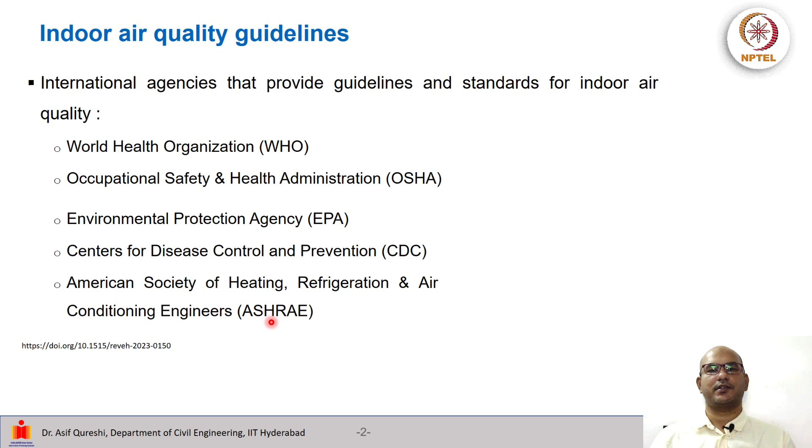The World Health Organization works on developing and maintaining the health of the entire world - that is its mandate in a way. For air quality, it works on developing health-based guidelines for maintaining air quality with a view to controlling the impacts on human health. The WHO was founded in 1948 and is an organization of 194 member states. It is headquartered in Geneva, Switzerland, and has 6 regional offices and 150 field offices across the whole world.

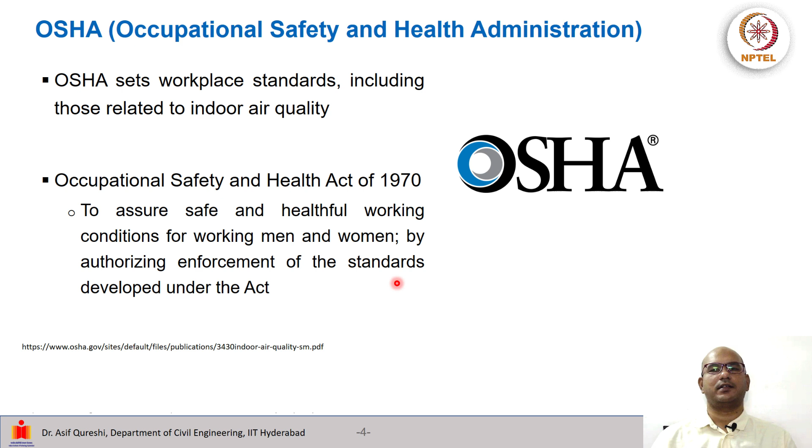The OSHA, Occupational Safety and Health Administration - as the name suggests, deals with occupational safety and health. OSHA sets workplace standards, including those related to indoor air quality. It makes standards for overall health and safety in occupational settings, meaning in factories or other industries where people go to work as part of their occupation. So within the purview of all standards and quality, we also have indoor air quality, which is set by OSHA. It is governed by, or the driving force is, the Occupational Safety and Health Act of 1970 in the US, to assure safe and healthy working conditions for all workers, by authorizing the enforcement of standards developed under the Act.

Then there is the EPA, US EPA. First we are looking at global and other countries, and we will also cover the Indian scenario. EPA's indoor air quality guidelines cover various aspects of indoor air quality. These include maintaining, mitigating, or keeping a check on health risk, then exposure reduction - reducing exposure to different kinds of pollutants in the indoor air environment, which in turn will reduce the health risk. And then how can air quality be improved in the indoor environment? It also provides an indoor air quality reference manual and a building air quality guide, even giving guidance to people constructing or designing a new building on how to go about construction and the whole arrangement to have appropriate indoor air quality.

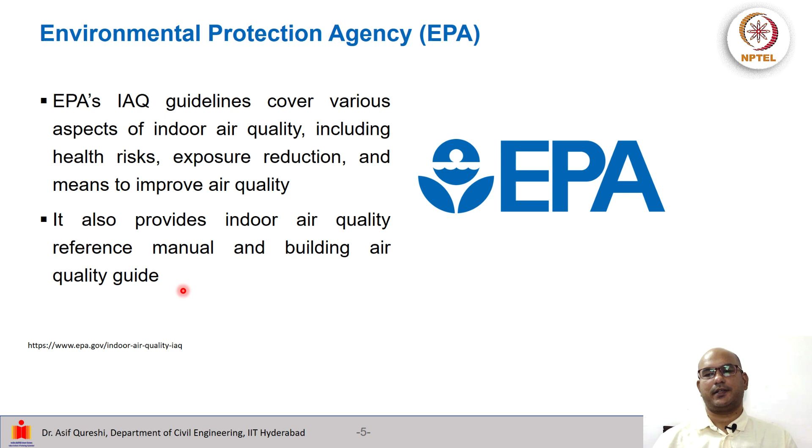Then we have the International Organization for Standardization, ISO. ISO also provides a framework for assessing and improving indoor air quality in buildings - we have actually looked at this before in one of the earlier weeks. ISO provides these guidelines and also addresses many factors that affect the health and well-being of building occupants. So it contains a whole suite of factors and scenarios to improve overall health conditions.

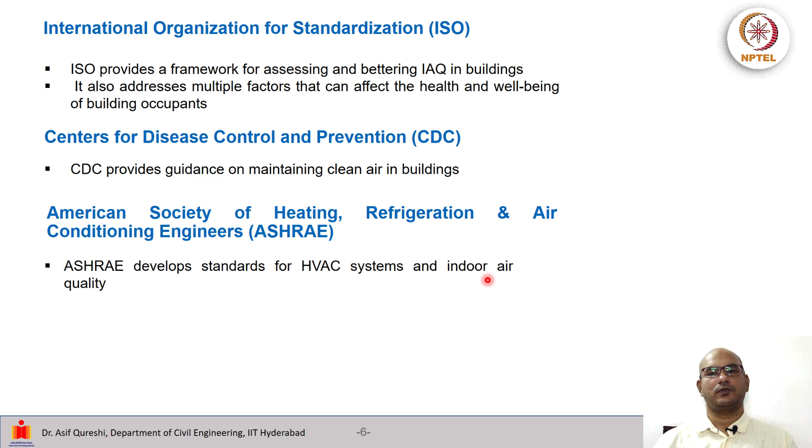There are other agencies such as the Centers for Disease Control and Prevention, which provides guidelines for maintaining clean air in buildings with the view of preventing the spread of disease, as well as controlling or preventing disease from happening. Finally, there is the American Society of Heating, Refrigeration and Air Conditioning Engineers, and the idea here is that it develops standards for HVAC systems, ventilation systems, and indoor air quality.

So what is a guideline and what is a guideline value? A guideline is a recommendation or guidance given on the protection of human beings or receptors in the environment from adverse effects of air pollutants - it can be more qualitative, that one should do something or should not do something. A guideline value, on the other hand, is a particular form of guideline with a numerical value expressed either as a concentration in ambient air or as a deposition level that is allowed. So a guideline value gives a hard number, quantitative information on what can actually be done or achieved to enforce this guideline, whereas a guideline is more qualitative. For example, 'the concentration should be controlled' is a guideline. 'The concentration should be controlled so that it is below 1 microgram per meter cube' gives us a guideline value of 1 microgram per meter cube. That is the difference.

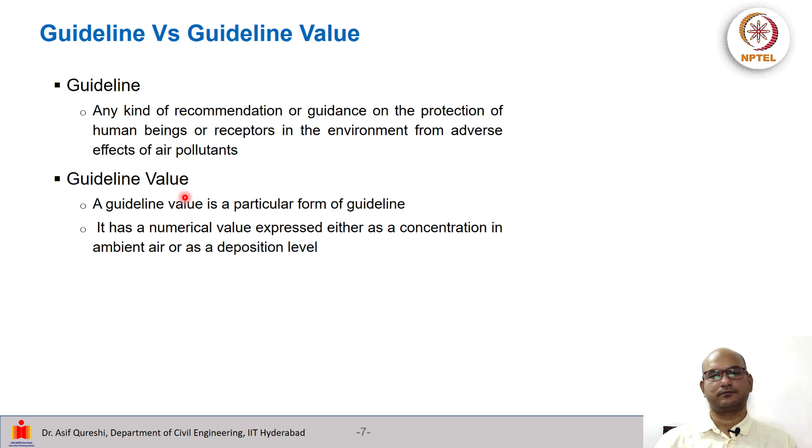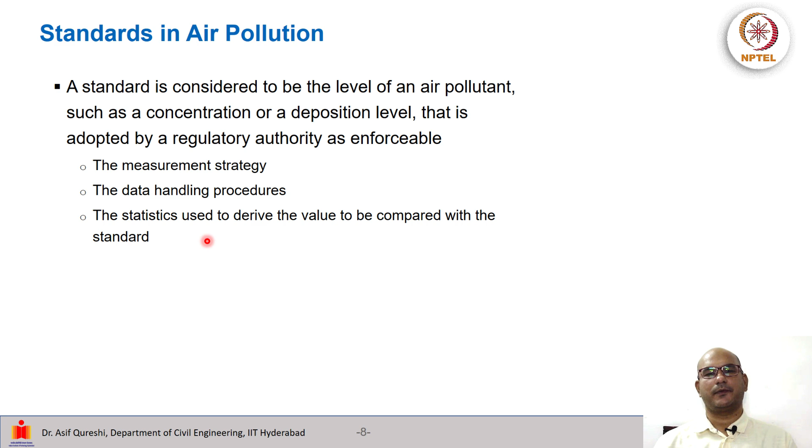Now, standards in air pollution. A standard is the level of an air pollutant, such as a concentration or deposition value, that is adopted by a regulatory authority as enforceable - meaning the agency can force an industry, a building person, a building management, or anyone to comply with this standard value. It is enforceable by law. It can also contain measurement strategy, data handling procedures, and uses statistics to derive the value to be compared with the standard.

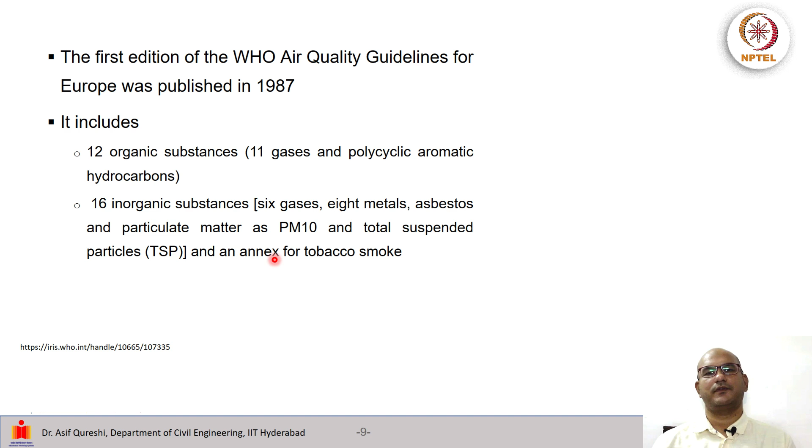The first edition of WHO air quality guidelines was published in 1987 for Europe and included 12 organic substances, of which 11 were gases and one was polycyclic aromatic hydrocarbon. There were 16 inorganic substances, including 6 gases, 8 metals, asbestos, and particulate matter as PM10 and total suspended particles. It also included an annex specially for tobacco smoke.

This guideline was then updated in 2005. Previously it only had PM10. Now it also brings fine particles PM2.5, PM10 as inhalable particles, nitrogen dioxide, and ozone.

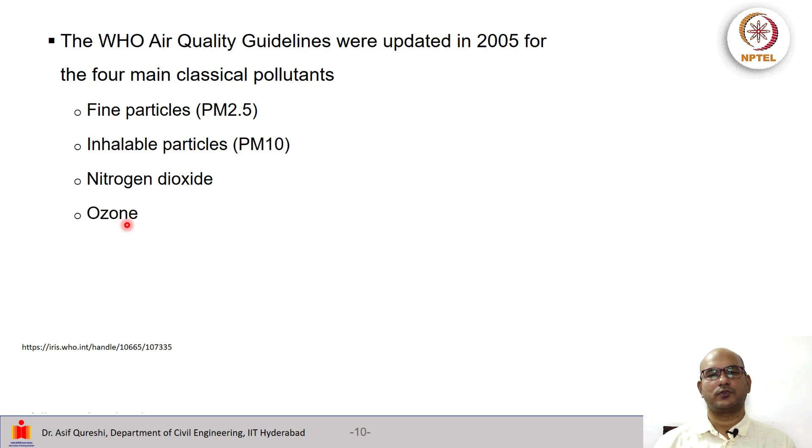So how can we have an overview now. The microclimatic requirements, we will go through like this, and these are different guidelines coming at different times: 2008, 2008, 2006, 2010, and then we are here.

Guideline values have been done in 2008 for worker security. Then 2006 and 2010, which were international values related to chemical pollution for ambient air and indoor air.

Microclimatic requirements were also introduced around 95, which was limited to certain functional units only. Then again 95 and 95. These temperature and relative humidity norms and guidelines were introduced very early with respect to which kind of room or which kind of activity we are expecting in a room, and accordingly temperature and relative humidity were given.

Ventilation requirements were also given first in terms of the external airflow rate and filter efficiency during the mid 1990s and up to around 2000. These requirements were also more limited to specific units, but by 2008 this association of engineers released guidelines covering external flow rate, filter efficiencies, and even the pressure, across several units of a house or of an indoor environment.

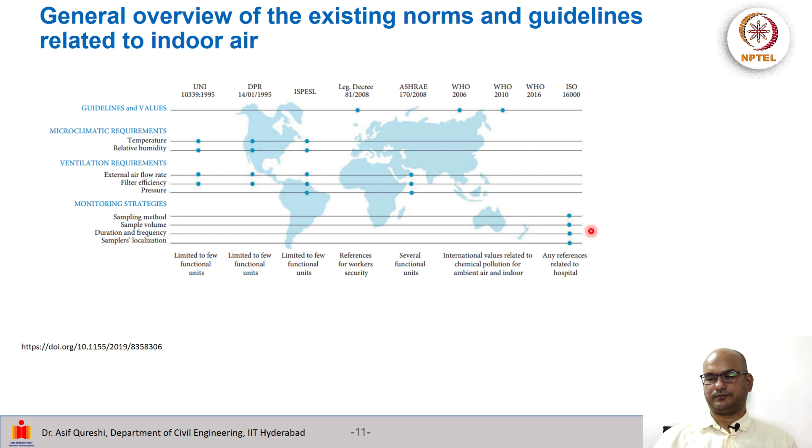There are air quality guidelines given by various agencies. The one that we have right now in front of us is the World Health Organization Air Quality Guidelines for the year 2021.

On the first column we have the pollutant, then on the second column we have the average concentration allowed over a given period. For example, annual mean means that on an annual average the PM2.5 concentration should not increase beyond 5 microgram per meter cube. But when we look at a 24-hour mean, over a 24-hour period, the PM2.5 concentration should not increase more than 15 microgram per meter cube.

There is a bit more relaxation on PM10, in that the concentration should be 15 microgram per meter cube as an annual mean, but 45 microgram per meter cube, so 3 times, for a 24-hour mean. So here 5 to 15, here 15 to 45.

For carbon monoxide there is only one 8-hour mean value given, which is 4 microgram per meter cube. For nitrogen dioxide there is an annual mean stipulated of 10 microgram per meter cube. For sulfur dioxide there is a 24-hour mean of 40 microgram per meter cube as the air quality guideline. For ozone there is an 8-hour mean of 100 microgram per meter cube, and a much lower value as an annual mean for lead of 0.5 microgram per meter cube.

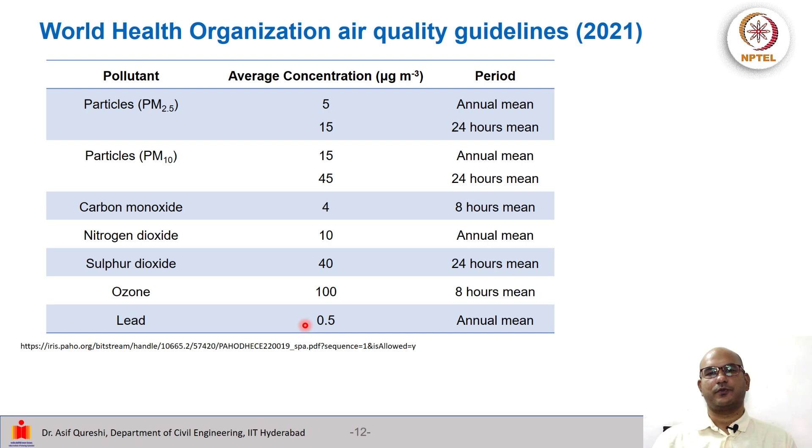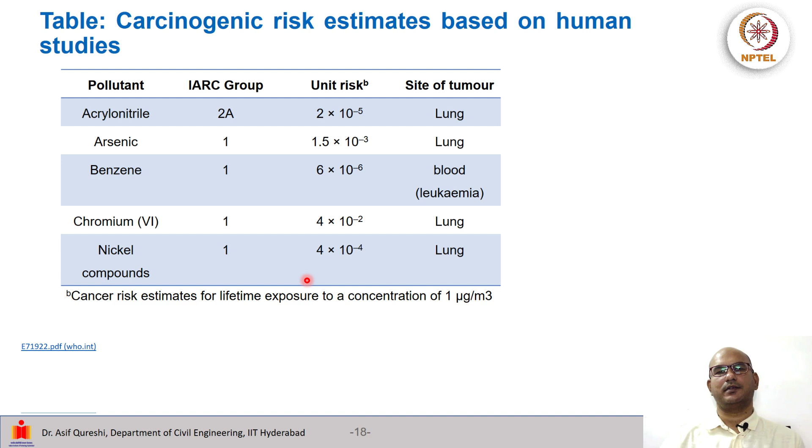Then nickel compounds, the unit risk is 4 into 10 to the power minus 4. For polycyclic aromatic hydrocarbons such as BAP, benzo-alpha-pyrene, the risk is also comparable to chromium 6, 9 into 10 to the power minus 2, the site of tumor being the lung. For refractory ceramic fibers, the risk is 1 into 10 to the power minus 6 and the site is lung. For trichloroethylene, 4.3 into 10 to the power minus 7. For vinyl chloride, 1 into 10 to the power minus 6.

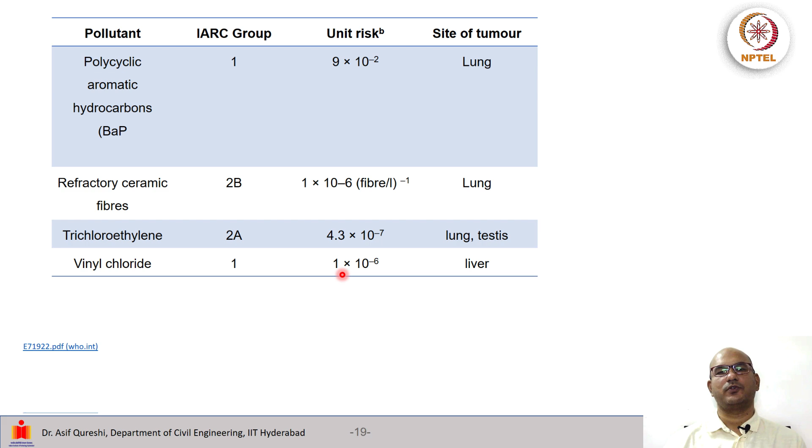Now radon, as we have seen previously, also is a special case, and there are reference values according to two organizations. There is also US EPA, which is not listed here. The two listed here are European Union, where the reference is that if the value becomes more than 400 becquerel per meter cube in an existing building or a new construction, quickly the action should be taken to reduce these levels. This value basically denotes average annual concentration and a certain equivalent dose per year.

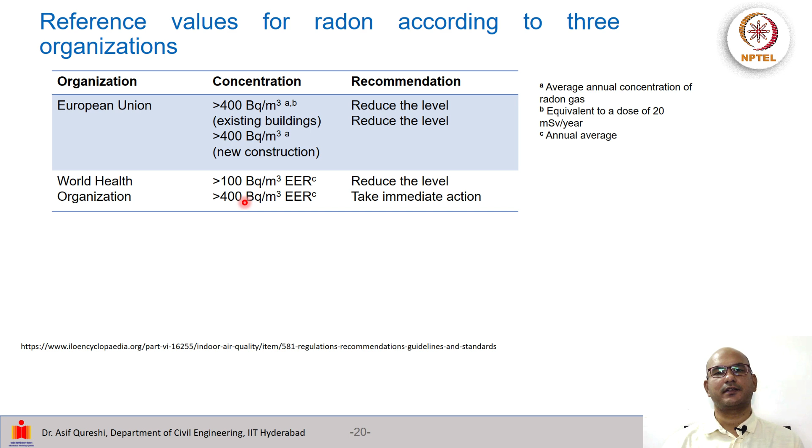For World Health Organization, if the value is more than 100, people should try to reduce the level, and if it is more than 400, immediate action should be taken. So in a way it looks to be stricter, that 400 means immediate action must be taken.

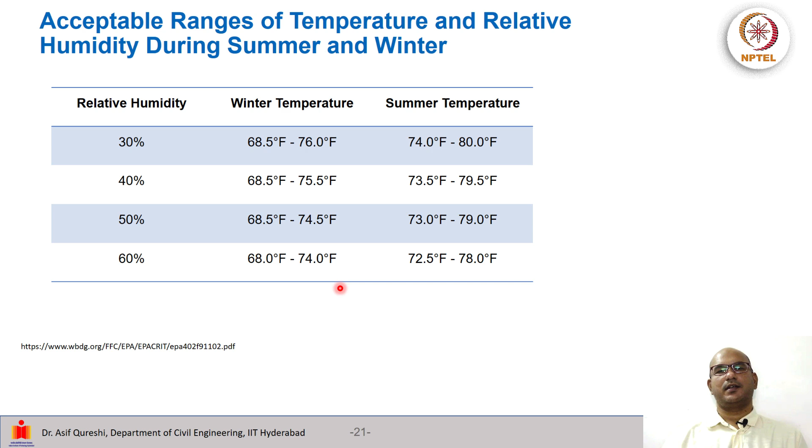So as the relative humidity is increasing, the acceptable range is actually decreasing in terms of the temperature. The minimum temperature has decreased, even the maximum has decreased, in winters as well as in summers.

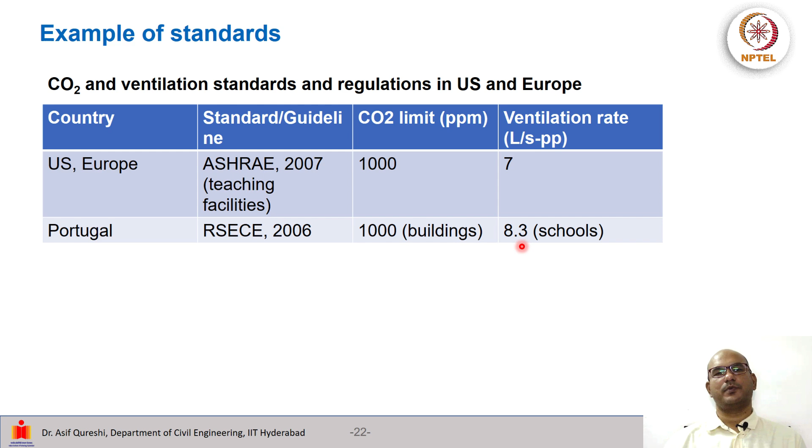We also have examples of standards for ventilation rates and CO2. In the US and Europe, the association ASHRAE gave guidelines in 2007 for teaching facilities: the CO2 limit was set at 1000 ppm with a ventilation rate of 7 liters per second per person. For Portugal, the CO2 limit was also set at 1000 ppm for all types of buildings, with a ventilation rate of 8.3 liters per second per person required in schools.

As we've seen in one of our weekly lectures, the ventilation rates per person and air exchange per person required to achieve a selected CO2 level have also been given by ASHRAE. For 7 years of age, the CO2 generation is around 1.8 milliliters per second per person. If the CO2 limit is 600 ppm, the ventilation rate should be 9.2 liters per second per person. But if we relax the allowable CO2 limit to 2000 ppm, the required ventilation rate decreases from 9.2 to 1.1 liters per second per person.

At age 10, CO2 generation increases to 2.6 milliliters per second per person, and for an allowable CO2 limit of 600 ppm, the ventilation rate required is 13.1 liters per second per person. For the same CO2 limit, as age increases, the required ventilation rate also increases because the CO2 generation rate has increased. If we relax this limit from 600 to 2500 ppm, the required ventilation decreases from 13.1 to 1.2 liters per second per person.

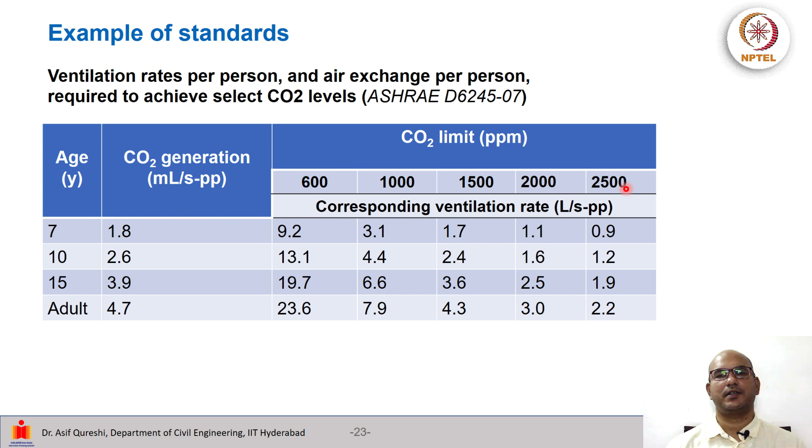The highest generation of CO2 is for adults, at 4.7 milliliters per second per person, so the correspondingly required ventilation rate is also the highest. For a 600 ppm allowable CO2 limit, the required ventilation rate is 23.6 liters per second per person, decreasing to 2.2 liters per second per person if the CO2 limit allowed is 2500 ppm.

There are also guidelines for air exchange needed in numbers per hour, depending on how much area is available per person. If only 1 square meter of area and 2.5 cubic meters are available per person, the person has a very confined space—1 meter by 1 meter is not a lot of area. To maintain a good CO2 limit of 600 ppm, the air exchange needed is 34 per hour, meaning the air should be fully exchanged once every less than 2 minutes.

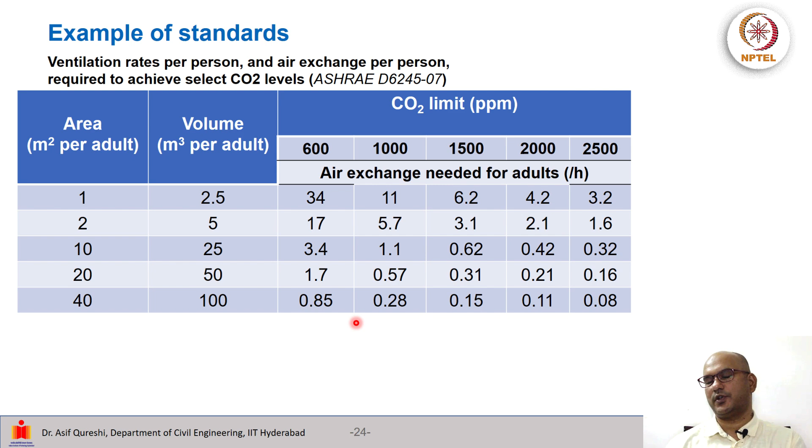But if we allow more CO2, we can have just 3 air exchanges per hour. If we increase the available area per adult from 1 to 40 square meters and the volume per adult from 2.5 to 100 cubic meters, assuming a 2.5 meter height, then for a 600 ppm allowable CO2 limit, only 0.85 air exchanges per hour are needed. If the CO2 limit is relaxed to 2500 ppm, only 0.08 air exchanges per hour are needed. So as more area becomes available per person, the amount of air exchange required in the indoor setting decreases quite a lot.

There are some regulatory bodies in India establishing and overseeing indoor air quality standards. One is the Central Pollution Control Board (CPCB), a statutory organization under the Ministry of Environment, Forest and Climate Change. The CPCB formulates policies and standards for indoor air quality and monitors air quality across the country. We also have the Bureau of Indian Standards (BIS), responsible for setting standards and certifying products, which has introduced guidelines for several indoor air quality parameters.

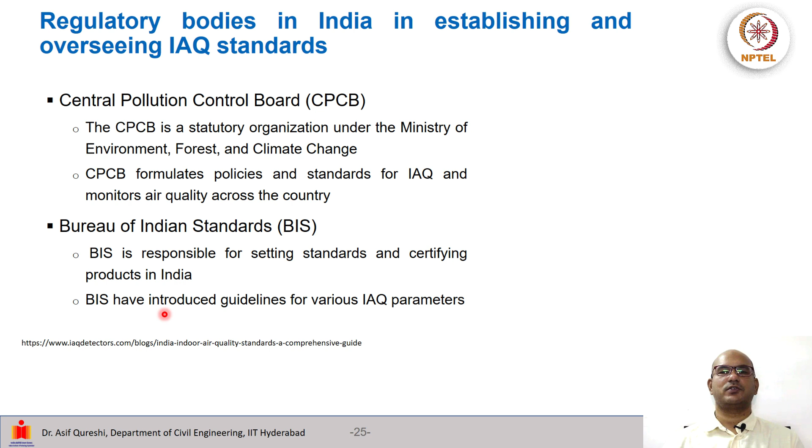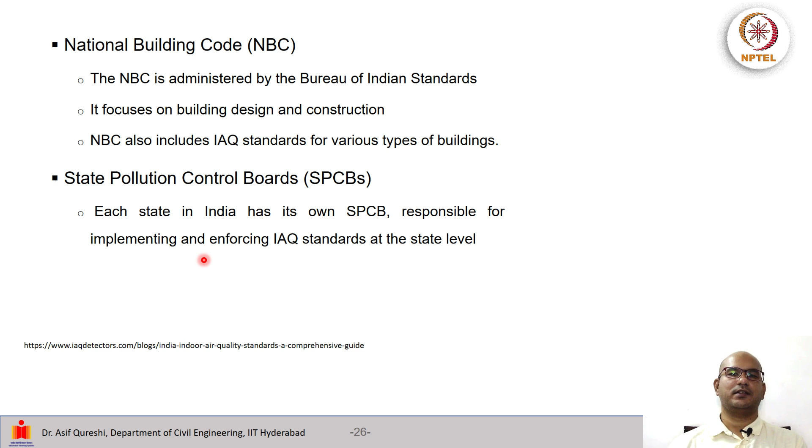We also have the National Building Code (NBC), administered by the Bureau of Indian Standards, which focuses on building design and construction aspects, including indoor air quality standards for different types of buildings. Finally, we have the State Pollution Control Boards, which come under the state but also act as the state arm of the CPCB. Each state in India has its own SPCB responsible for implementing and enforcing indoor air quality standards at the state level.

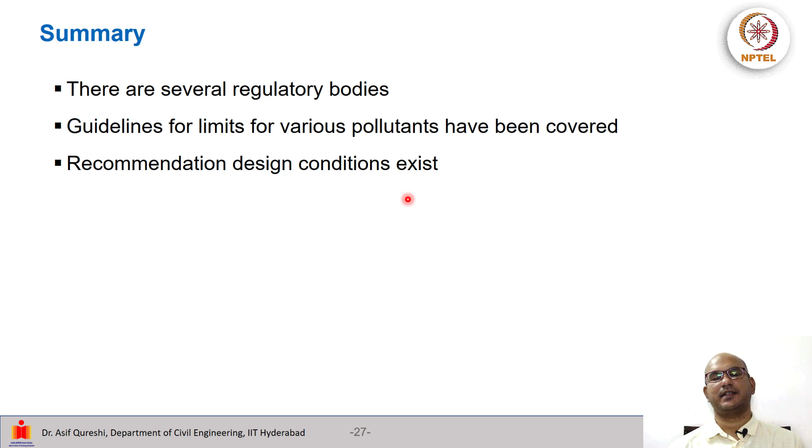In summary, there are several regulatory bodies along with guidelines or reference values for various pollutants, and recommended design conditions defined by different authorities—for example, how many air exchanges are needed per hour, or how much ventilation rate is needed in liters per second per person. This concludes this particular lecture.